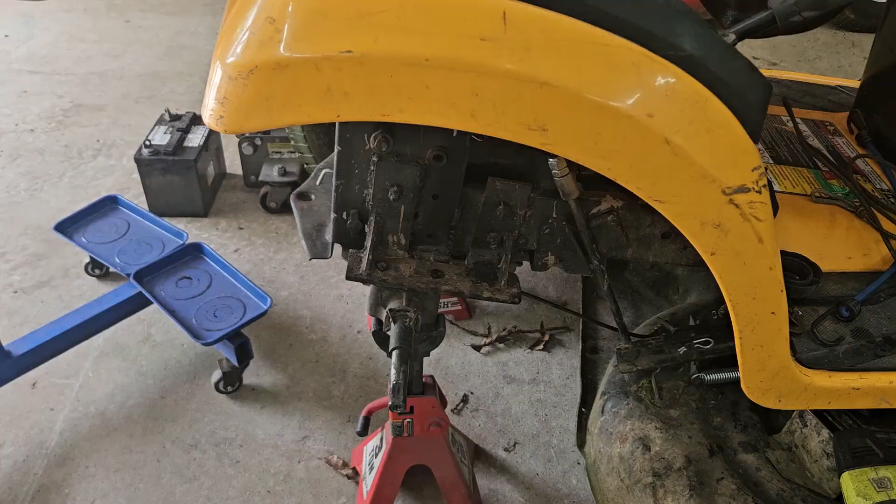Today we're going to be working on this Cadet XT1 Enduro series. And the problem we're having with this is this mechanism back here, the blade engagement mechanism on the frame back here. It actually goes up here, the manual PTO. And let me show you what's happening.

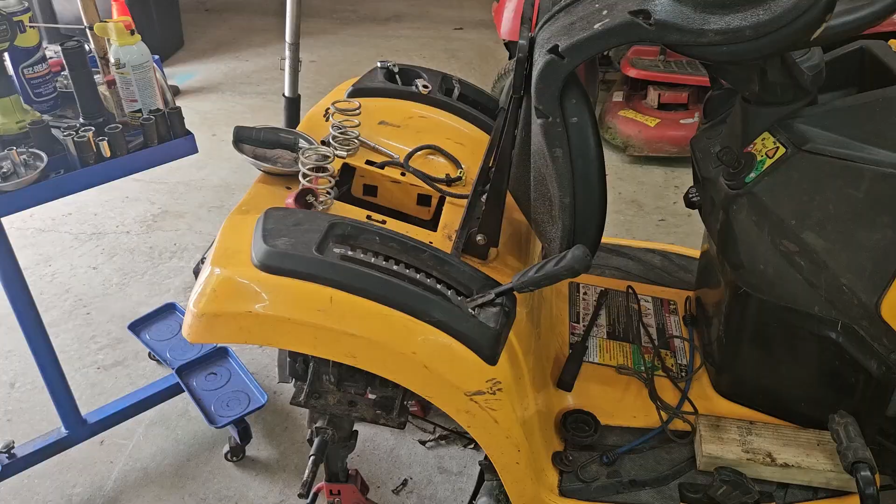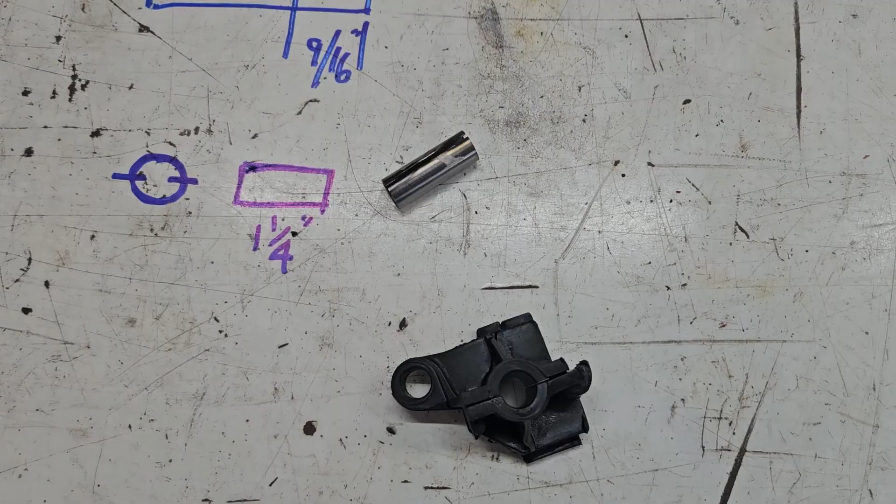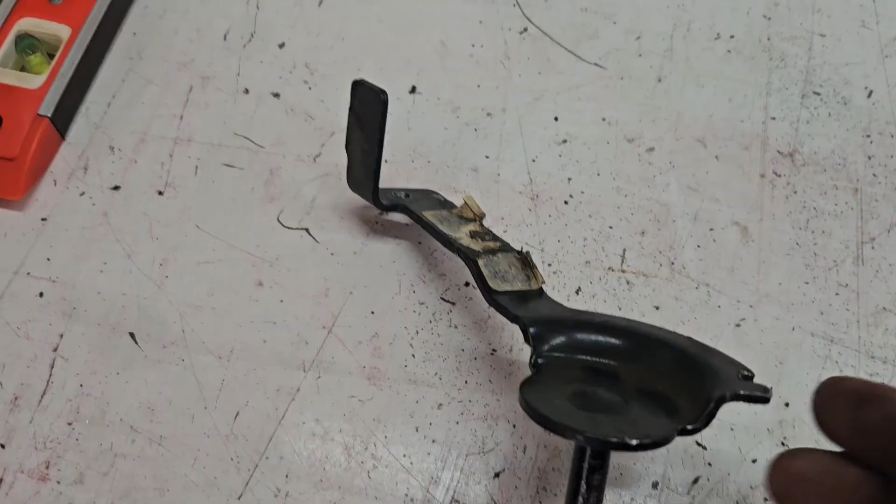All right, everybody. So here's the situation. If you've ever worked on one of these Cadet XT1s where the manual PTO rod, this one here with the crazy bend in it, goes down and pushes on the blade engagement safety switch. And this thing is just plastic. It's in two pieces. Well, now it's in three pieces because that ear broke off. And this part here, it opens up, well, it should anyway.

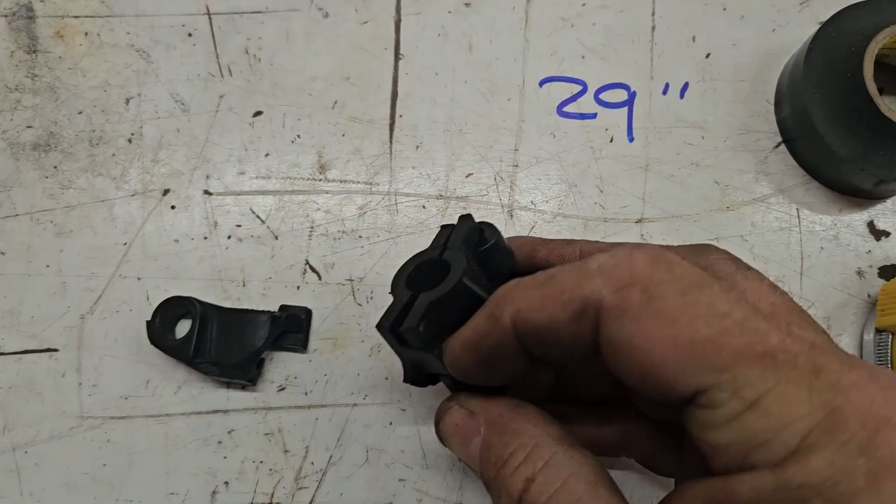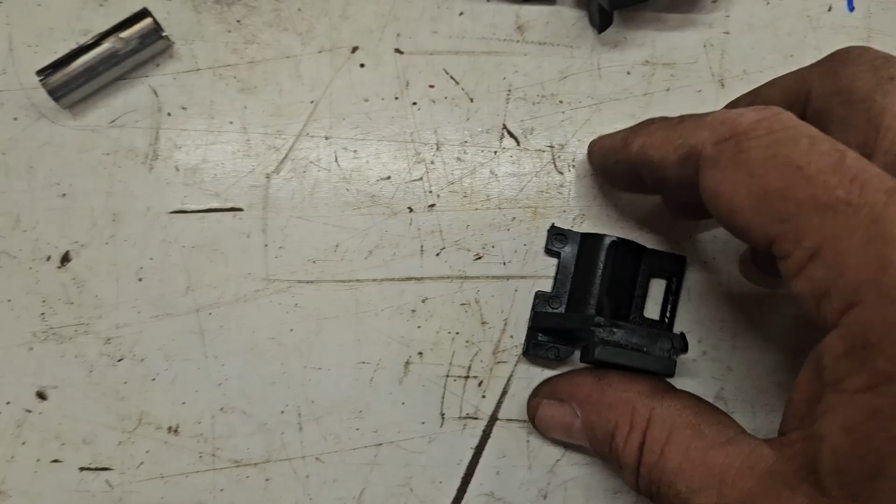They actually call this a bearing or a bushing. So it comes in two pieces. Each piece is $10 if you try to order one online. So I ordered the top piece that broke off, and that's it right there. If I remember, I'll put the part number down in the description.

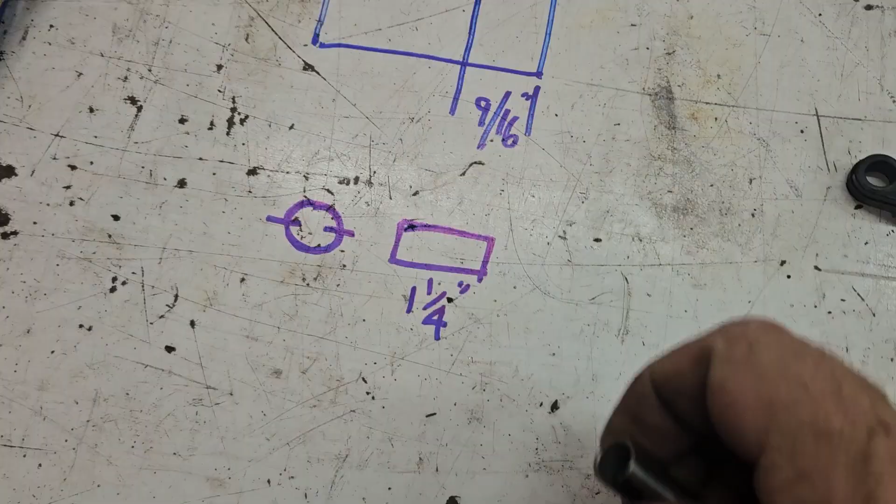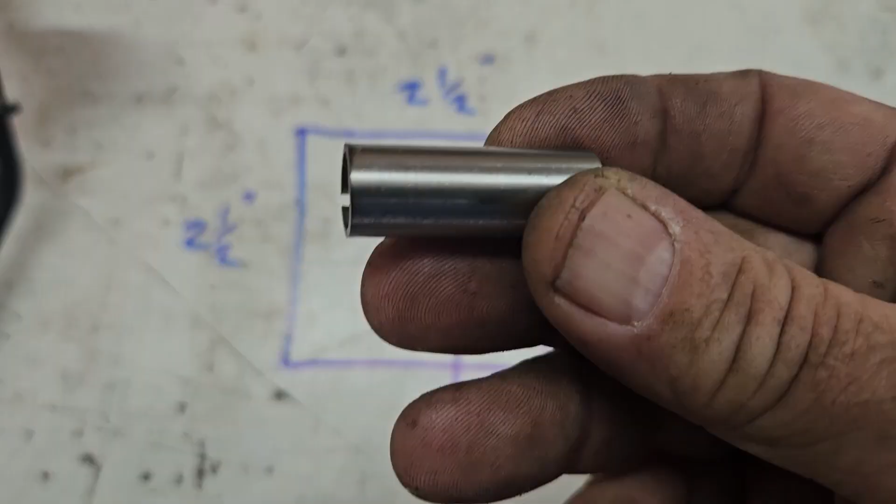But I got a wild hair, and I thought, well, what if I built a metal plate like this? It's 2.5 inches square and runs along the edge of the frame, which is right here, where this would normally slide into those grooves. And if I welded that plate on there and then put a sleeve over this part here, there would be no more plastic involved.

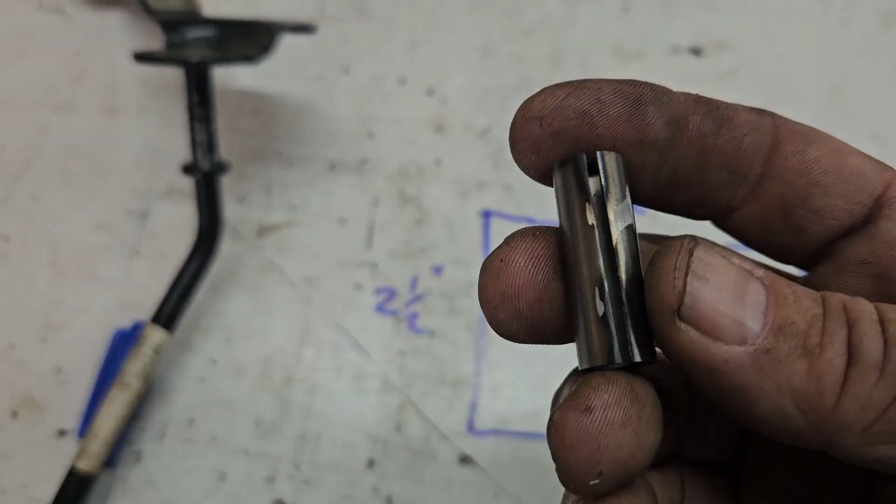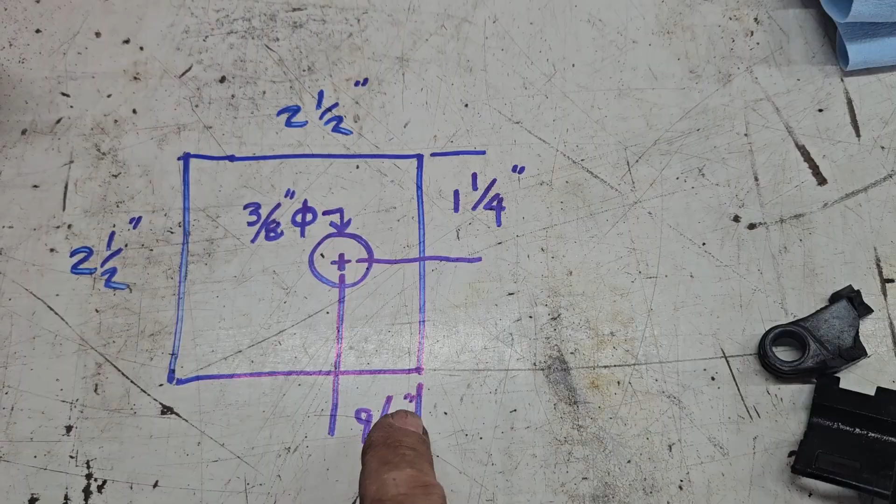So I went ahead and cut this bushing, or this spacer, to 1.25 inches long, like this says here, and I'm going to try to bend it open so I can get that shaft in there and then pinch it back closed. I'm going to make a plate 2.5 inches square, and I'm going to weld this to where I've indicated the centers are. I'm going to weld it to the frame. And hang on a second and I'll show you where it goes.

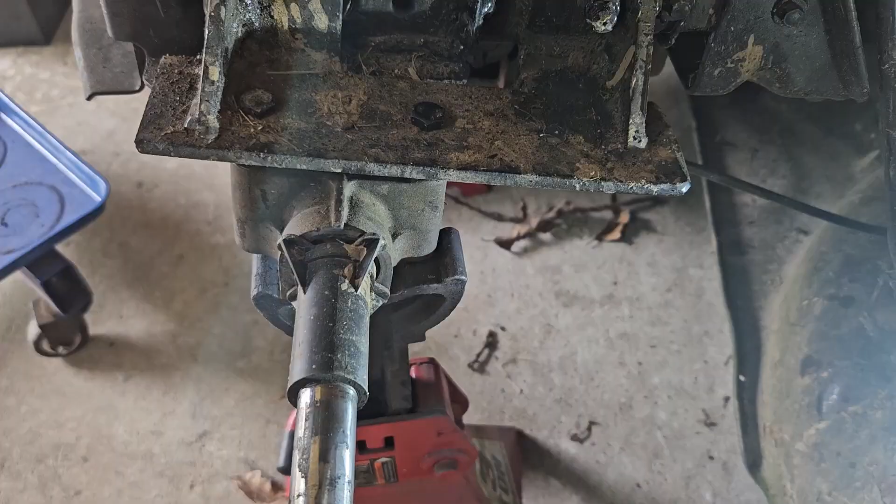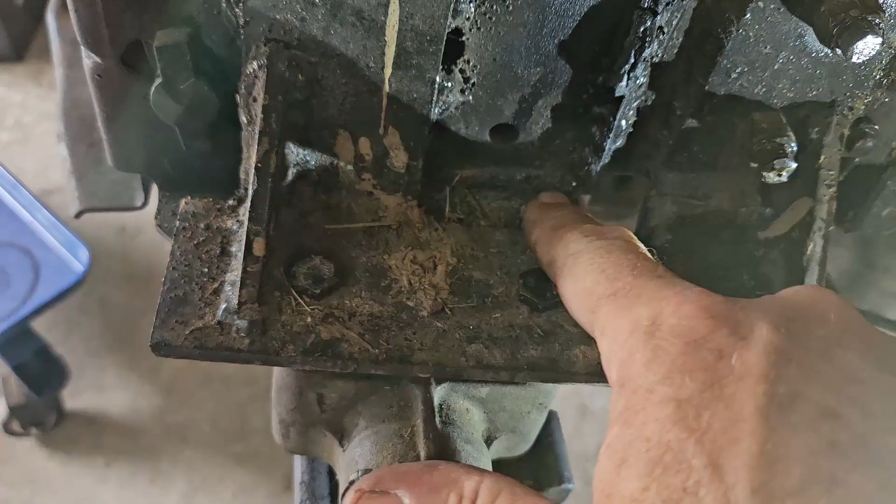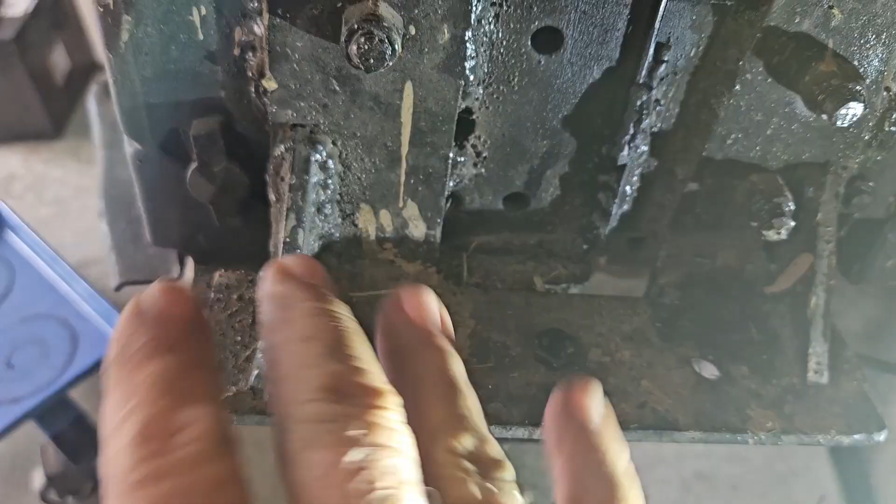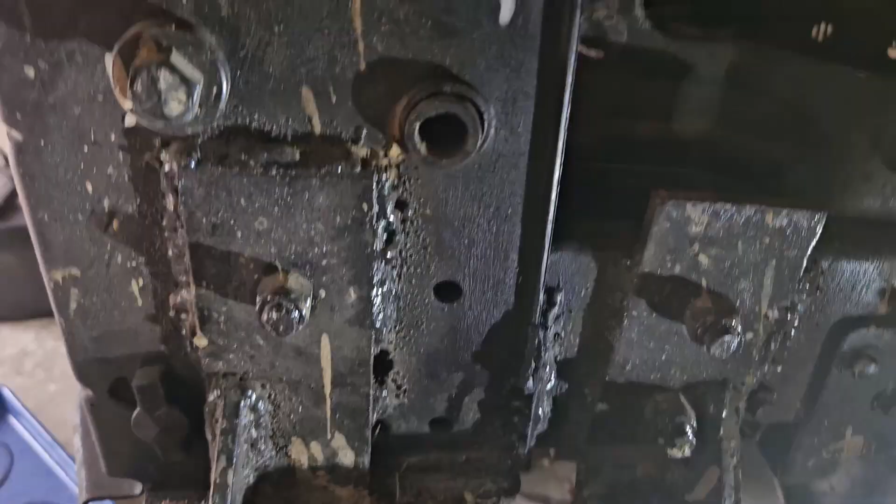All right, everybody. As you can see, I've already beefed up this frame several times with some angle iron because it was splitting down here, and every time he'd try to drive forward and backwards, the transmission was tilting this way and letting the belt slip off. So I put all this angle iron in here. I don't know if you can see there or not. That light's kind of bright. But I put some gussets in there and welded some angle iron and bolted it on there. It hasn't moved since. And that's been several years ago.

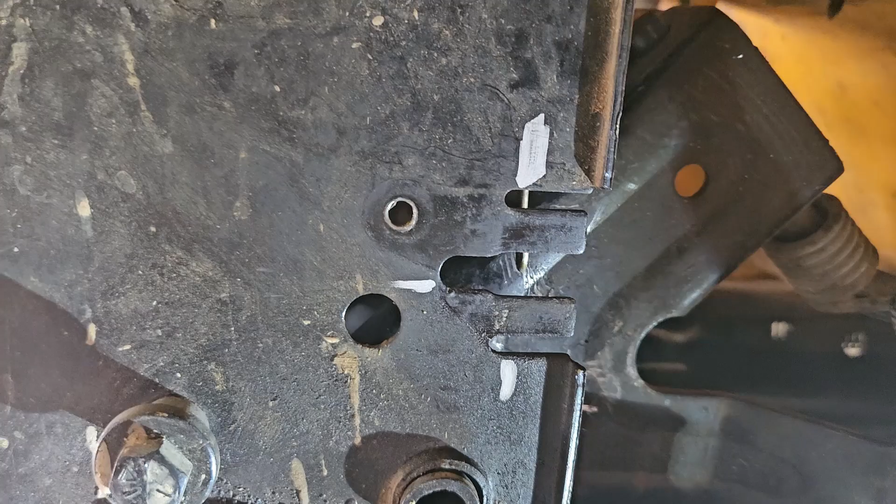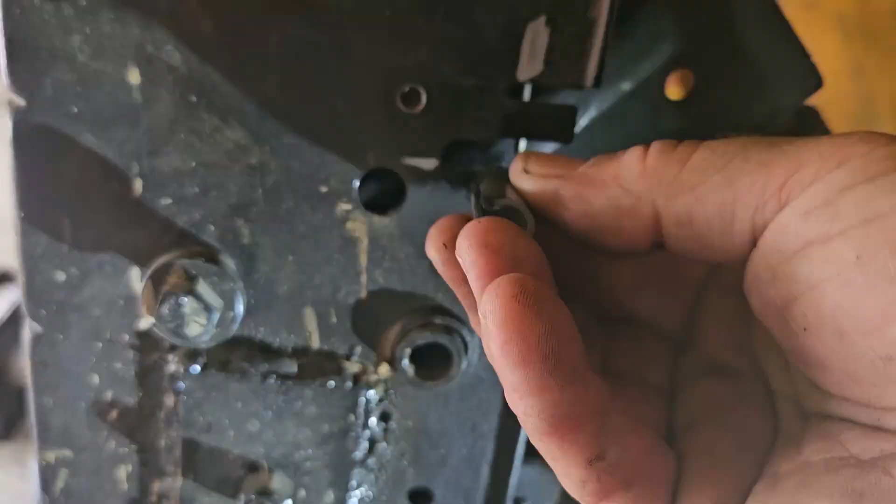But anyway, this mechanism right here, this silly little thing, slides in these grooves, and that's the locating hole to keep it centered this direction. And that's where your manual PTO arm goes through and activates the blades. So what I'm going to do is get rid of the plastic crap, and when I get that plate ready, this is actually going to be in here like this and welded in there on that plate, allowing that thing to move and quit flexing,

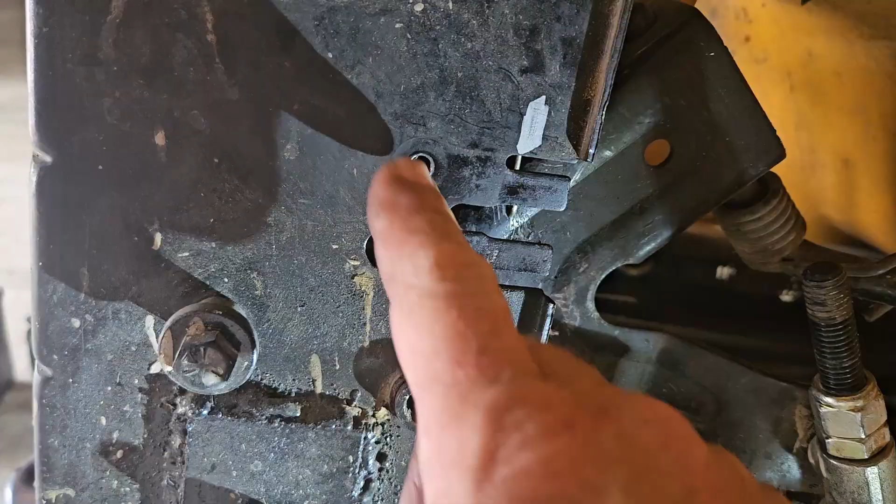because whenever you push that arm down, these tabs were bending and the plastic broke across here, and the locator plastic was just gone. That tab broke off, and it was allowing this to go sideways, which was bending these. So that plate is going to go around here with this sleeve in the middle around that arm. So that's what we're doing. I'll bring you back whenever I make some progress. Stay tuned.

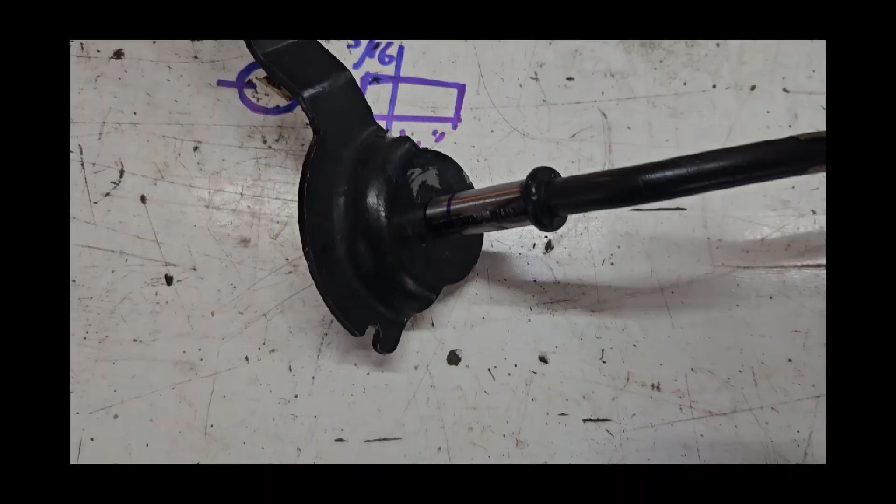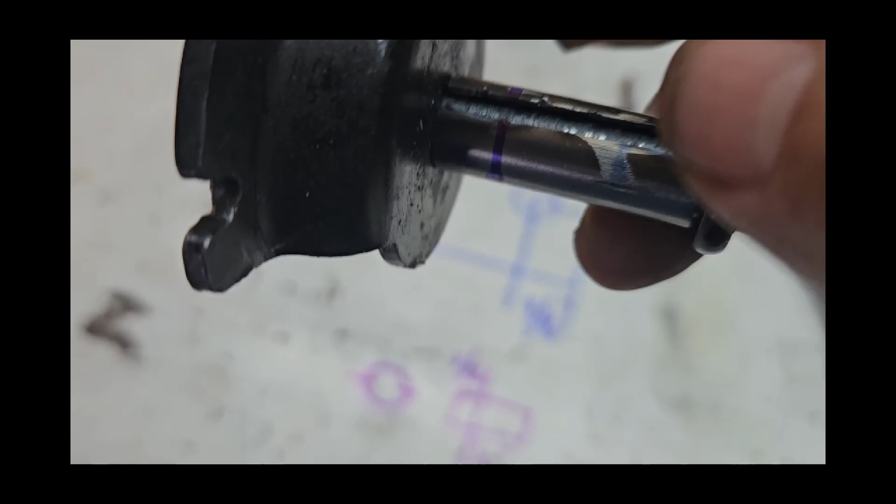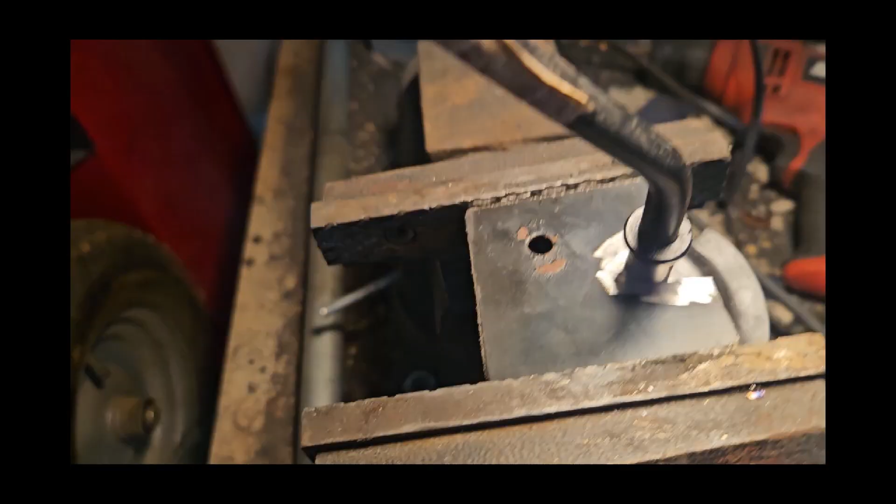Okay, so I got this bushing collar on here. I had to split it down the center, spread it open, and then bend it back around here. And then this is going to get welded into the plate. Okay. So, here is the plate that I made. I had to cut a notch out of it completely. This bushing gets welded in here nice and square, and then that little piece will get put back in there, and then this will rotate like that. So bear with me, let's see how it goes.

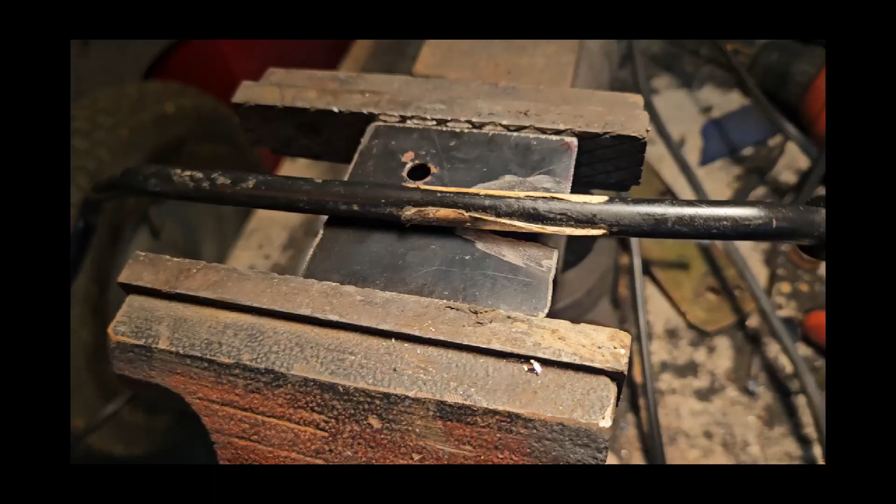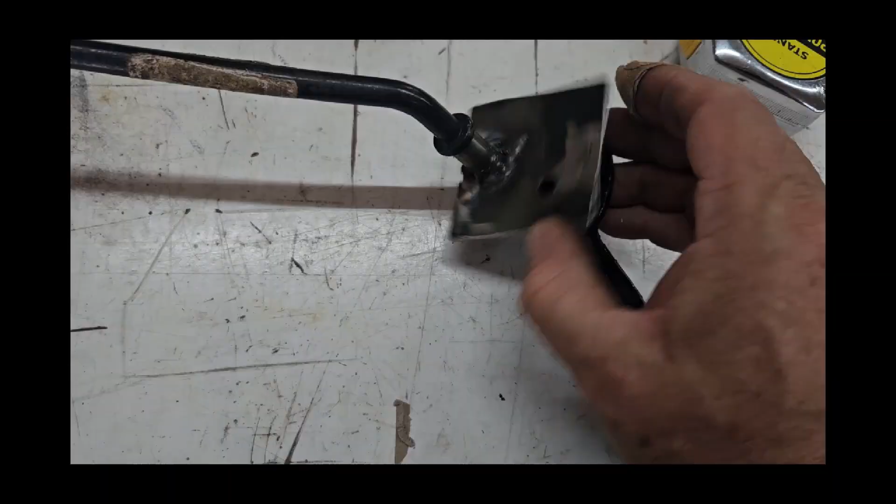Okay folks, I got that all welded up. It's not the prettiest, but this is essentially what we're creating. This plate's going to get welded on the frame in there, and that's going to allow this to rotate up and away from the safety switch, and to pull on the deck engagement cable that goes down and under the transmission. So in theory, we're doing away with this plastic piece of junk.

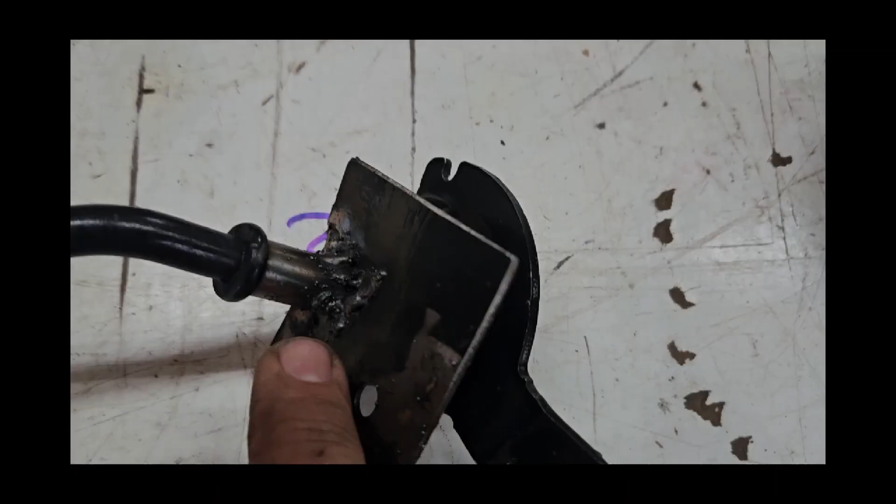This is greasable, and hopefully it will do the job. If not, we'll cut it out and find some other way to do it. I'm going to try to put a gusset right here to keep it from moving around too much. We'll see.

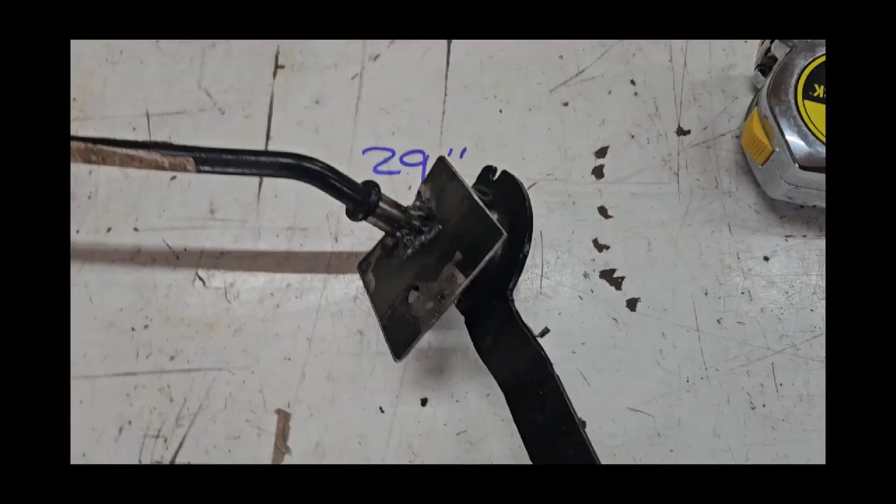All right, everybody. That is where the plate is going to go. Now, you can see how this is going to move. I got some manipulating to do on this piece here. It's pretty much bent up, but I'm going to get this welded around here. And no, I did not plan it, but that bolt hole that was already in that plate lined up perfectly. So, guess where that's going to live? All right, I'm going to get this welded in, and I'll bring you back.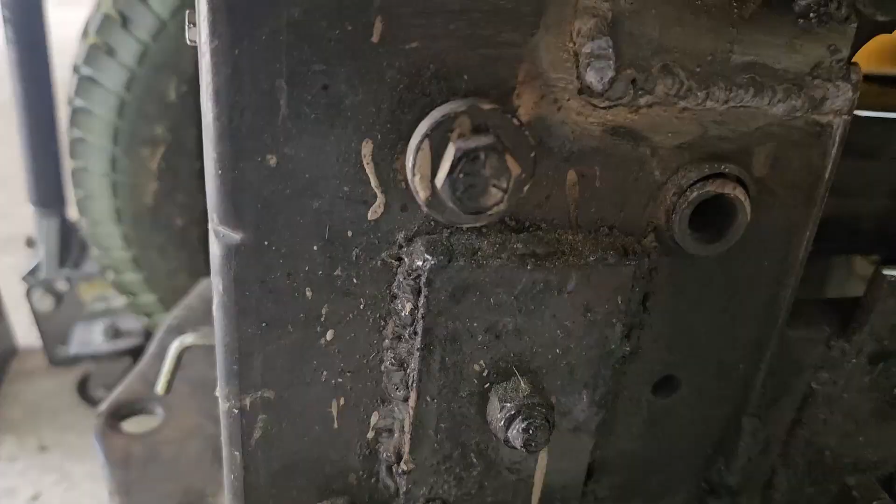Be safe. All right, I got all that burnt in, and for those of you who don't know where that's at, it's up underneath here above the rear wheel, and so that's gonna let this operate again, because of that gusset I put in there, it's not gonna have any movement this direction. So all I gotta do now is put the spring back on and get this rod here bent out a little bit so it catches in here.

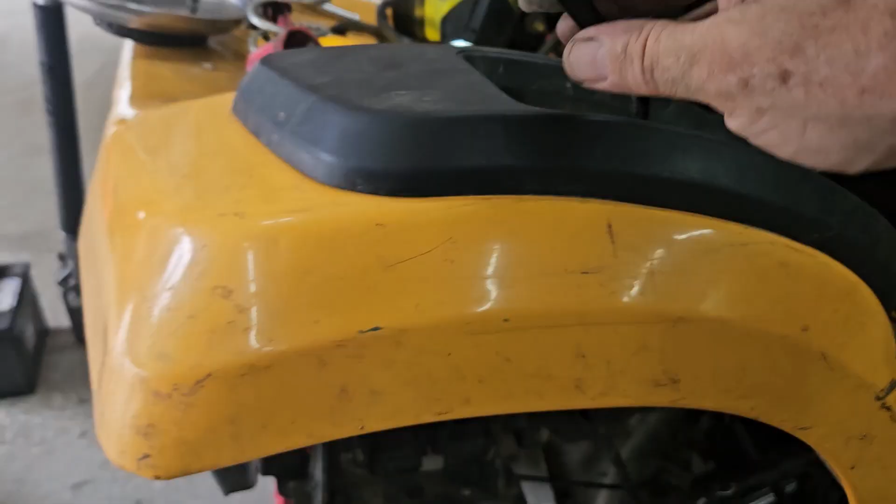This part of the shaft right here needs to be bent because over time it got bent towards me, so I just need to bend it out towards the driver a little bit. And for those of you who don't know what that's doing, that engages your blades and disengages your blades. And also

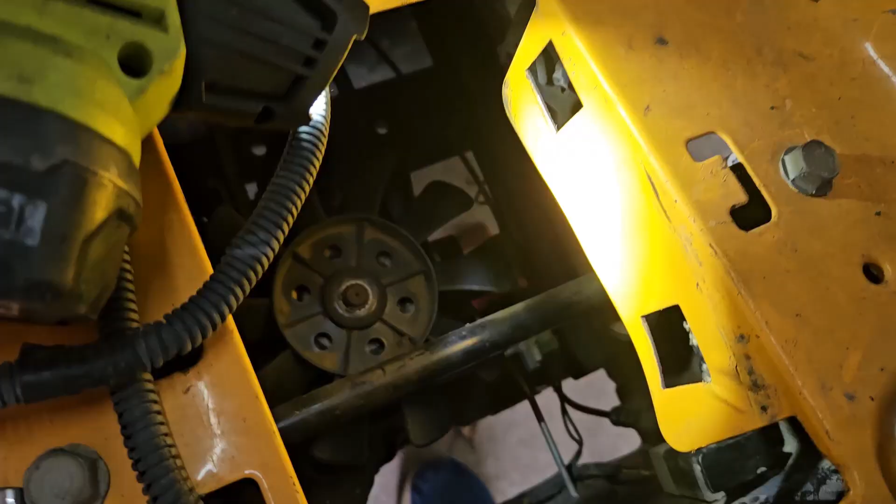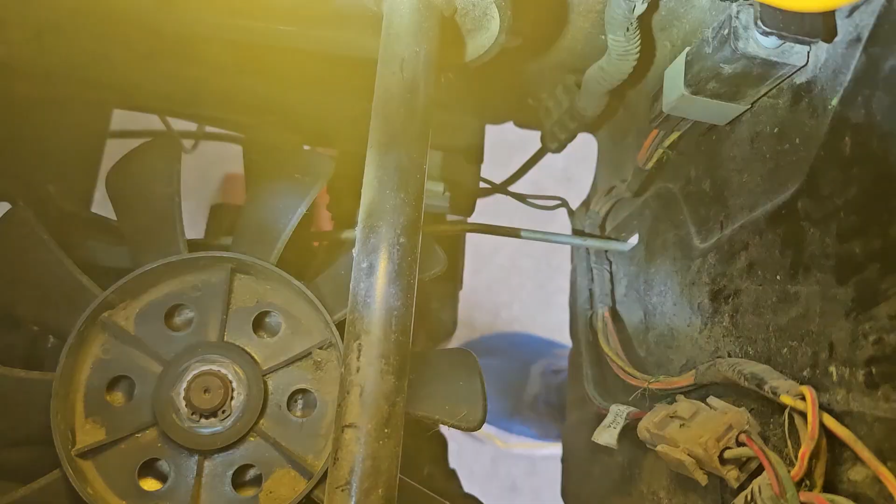inside here, oh gosh, let me see if I can get you in here. All right, it's a tough shot to get. Well, let's see. Let me actually put you in here. See if that gets it. All right. That thing you see there at the bottom is the safety switch. So that tells you that the blades are disengaged, and when you move that lever forward, it opens that up. So that's really what that does.

So then that'll allow you to start the mower because the blades are disengaged, and then that engages the blades back. So once I get all the springs back on, this will work. This should get pulled down like this and stay like that until you engage the blades. So bear with me, and I'll bring you back.

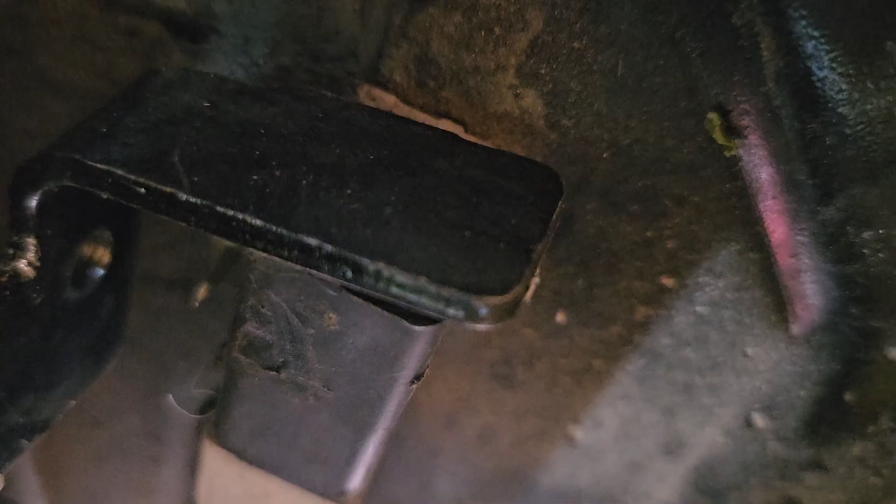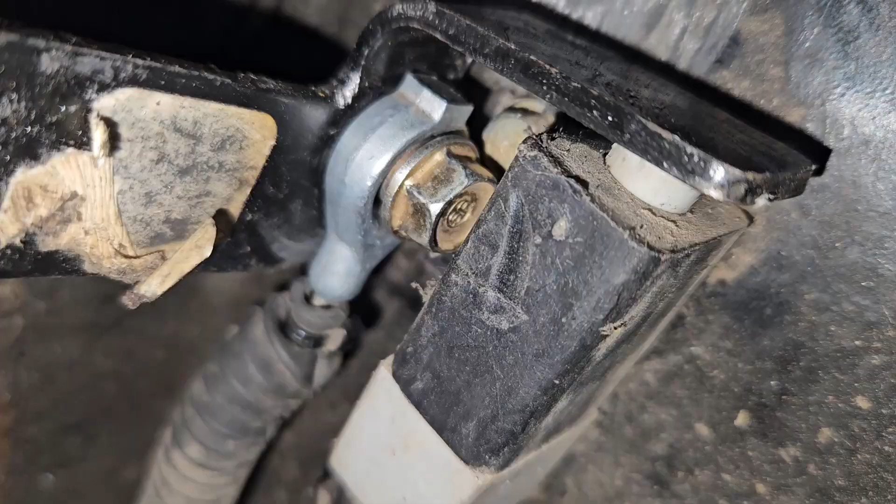All right, we're going back in, gang. So I got that cable hooked back up, and that's the cable that connects to the deck. That engages the deck down there. And it helps pull this lever back as well. As you can see, that safety switch is being depressed. It needs to be happier, but right now it's depressed. So I got one more spring to put on, and I'll show you my trick for that.

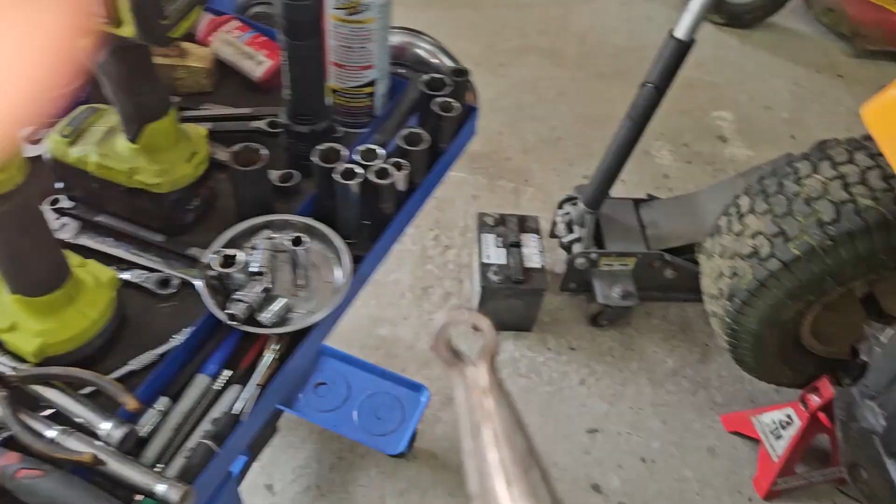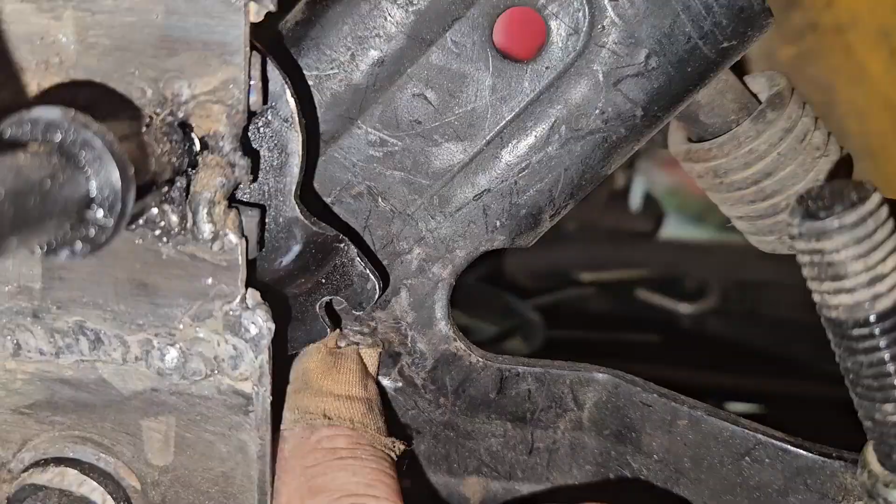Let's see, we're going to grab our small fuel line pliers, and I don't know if I'm going to be able to do this with one hand or not, but there's a notch right here, and this spring has to go in there. See that spring? So I'm going to try to do this with one hand. Alright, see if I can hold on to you.

Okay, so here we are. The last thing I had to do was put this spring back on here. And if you've never done this, use the smallest pair of fuel line pliers you got, and you can just go like this. Watch. See how I've got that spring off? I'm just going to pull it down. I pulled it down with the other hand, and it slides right in, and then you can just let go of it. So in this application, it works great.

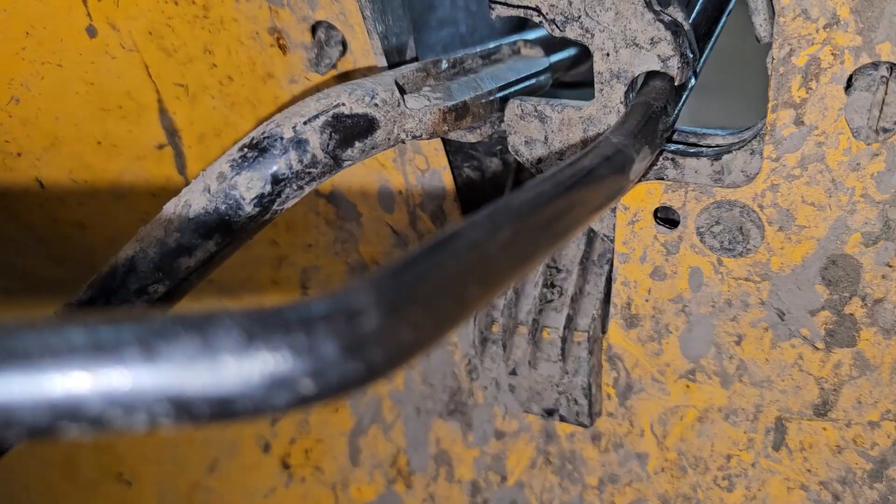So as you can see, blades engaged, J-hook's locked in, up underneath here, right there. The new blade spring, or the engagement spring. Disengage it, spring pulls it back, sets the safety switch, and we are set. All I gotta do is put the handle back on, and we're good to go. All right, there it is, all rebuilt.

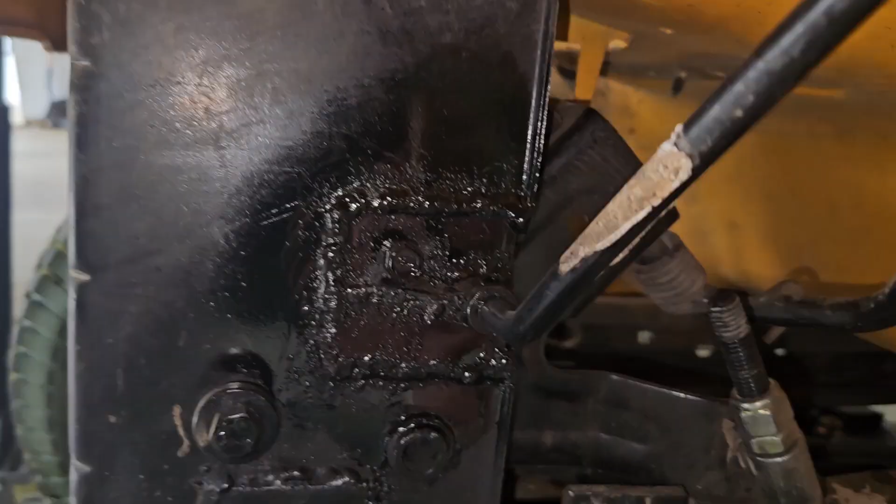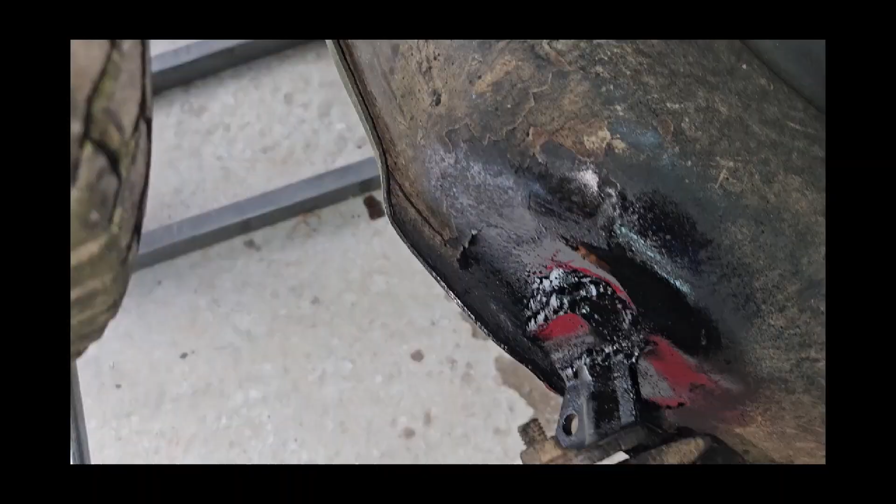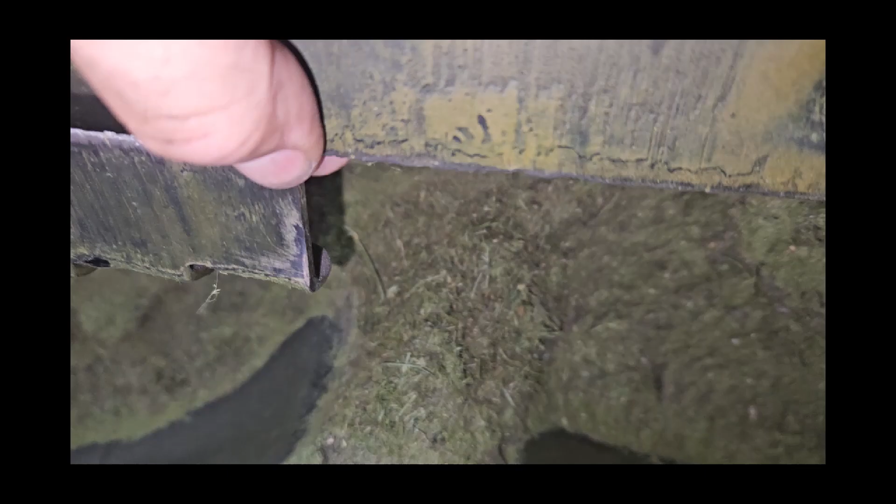All right, I got this scalp wheel back on, and I figured while I'm under here, I can go ahead and check the blades. There's the back side of my weld, kind of ugly, but it's under here. So these blades are within a 1/16 of each other. Spin this one around. Same thing, 1/16.

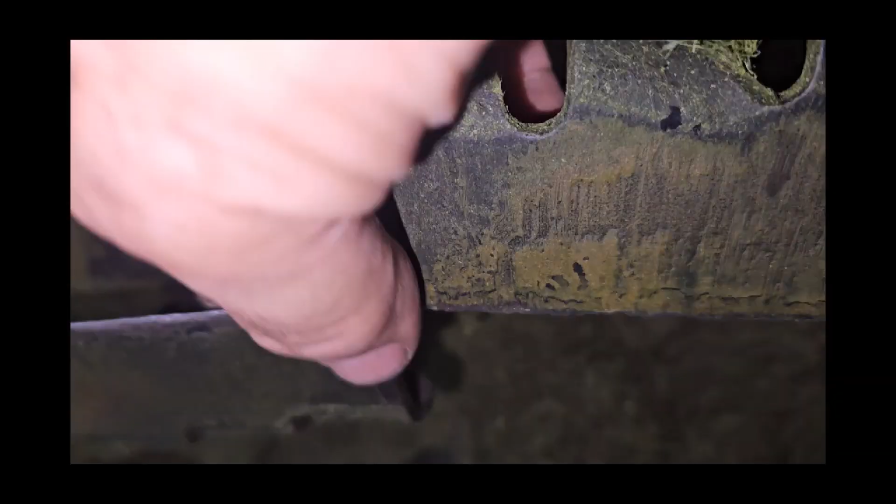Bring this other one around. Yeah, I'd say they're just a 1/16 off. Can't see that from where I sit. Nice and flush there, 1/16. All right, well, I hope PJ likes this one. It's a good fix. Hopefully he'll be able to keep this thing alive for a while.